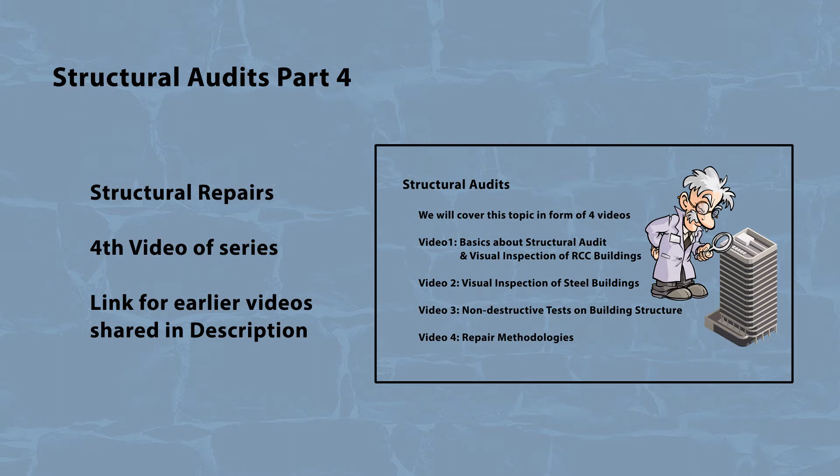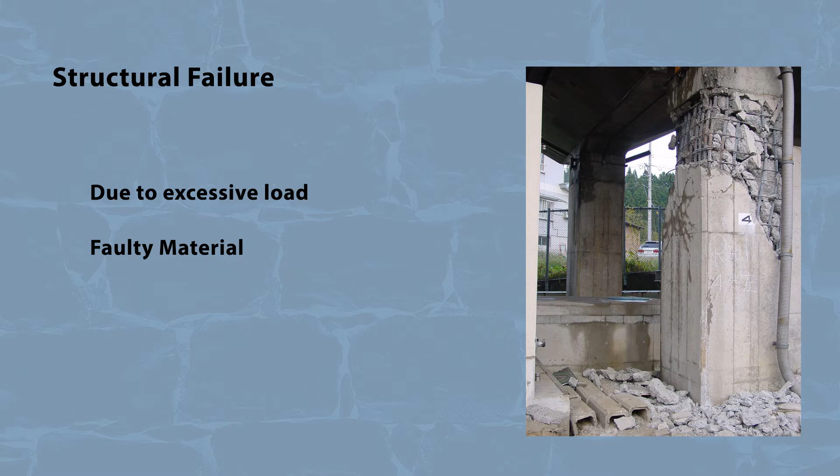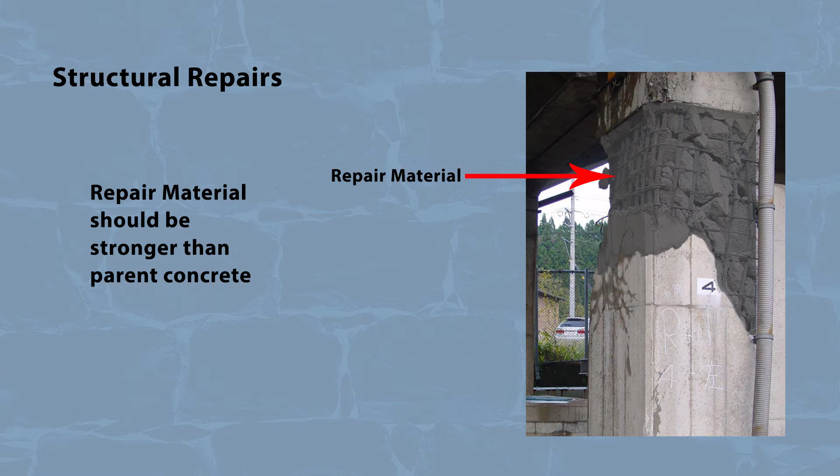Structural repairs are required due to failure of existing structure or some part of it due to any reason like excessive load, faulty construction material, etc. Hence, any new material which we use for structural repairs must be stronger than the existing materials of construction. In this video, we will be focusing upon repairs of RCC structures.

Any part of structure where repair is required must be opened and all loose material in it shall be removed. This area shall be thoroughly washed with water. The diameter of existing reinforcement is checked, and if it has become less by 1/3 of existing reinforcement, new reinforcement bar is welded to the existing one. After this, anti-rust chemicals of any good manufacturer are applied on it. This whole procedure completes the surface preparation for repairs.

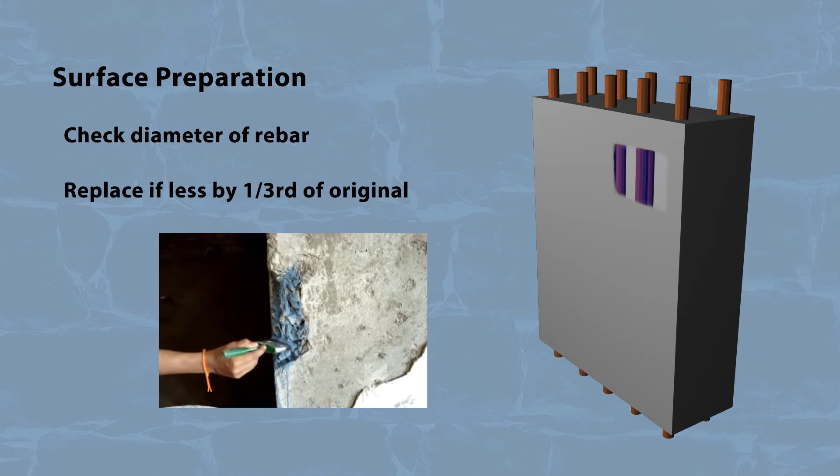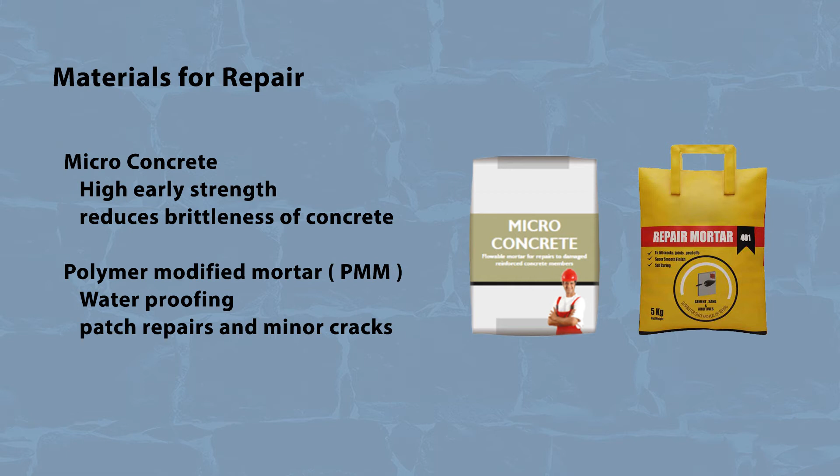Generally, two materials are preferred for structural repairs: polymer modified mortar or microconcrete. Microconcrete is most cost effective for improving high early compressive strength, tensile and flexural strength and reducing the brittle nature, while polymer modified mortar is useful for waterproofing and patch repair of minor cracks of the structure.

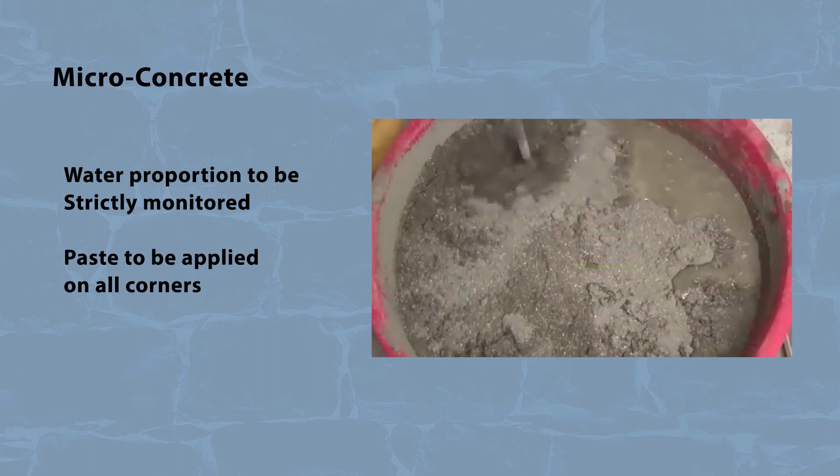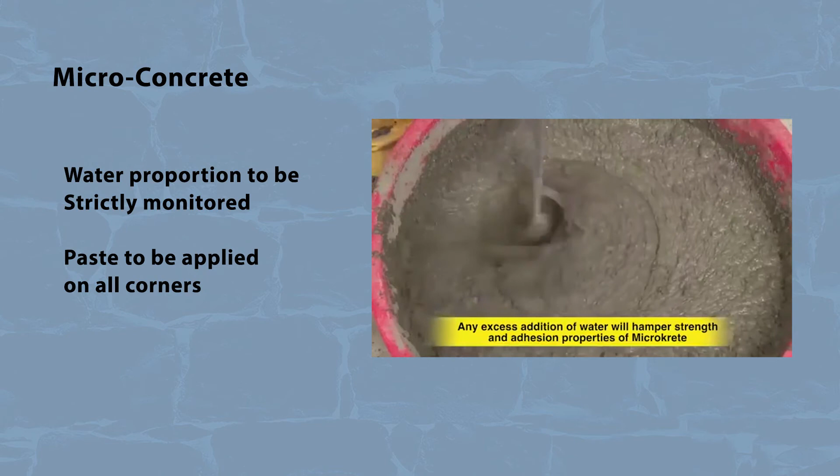Microconcrete is available in powder forms in ready to use packets. We have to use this powder with proportion of water as mentioned by manufacturer. The resultant paste is applied on the repair surface, which is prepared as per methodology mentioned earlier. While applying it, one must be careful that paste goes in all nooks and corners of the surfaces.

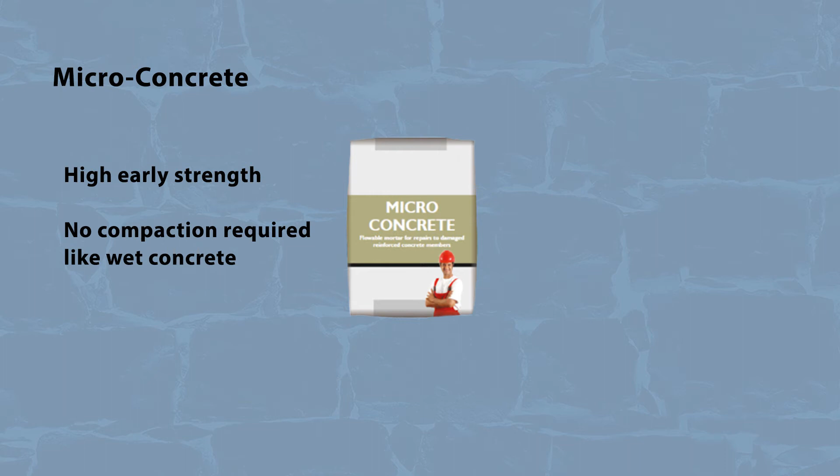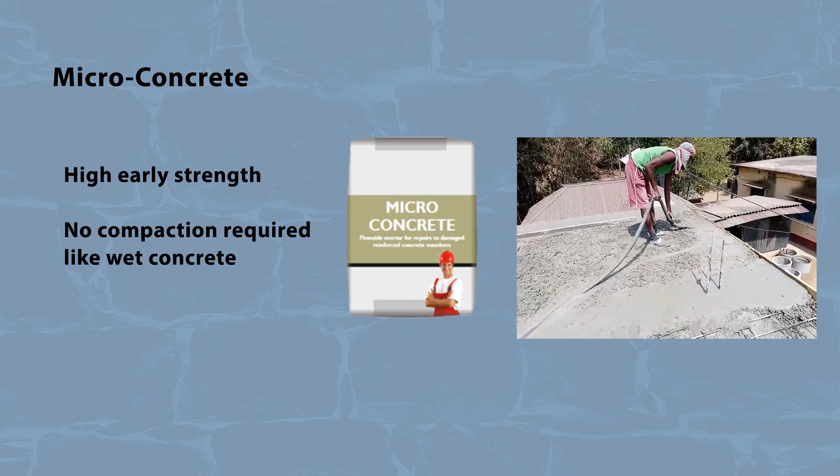Microconcrete is high early strength concrete, where there is no need for compaction. This means this concrete gains strength very quickly, even in a day depending on manufacturer, and there is no need for compaction like that of wet concrete.

Mortar is a mix of cement, sand and water. This is used for plastering works and also for joints in masonry work like brickwork. Polymer modified mortar means mortar being modified by use of some polymer compounds. These compounds give high strength to mortar, making it even stronger than the parent concrete of the material to be repaired.

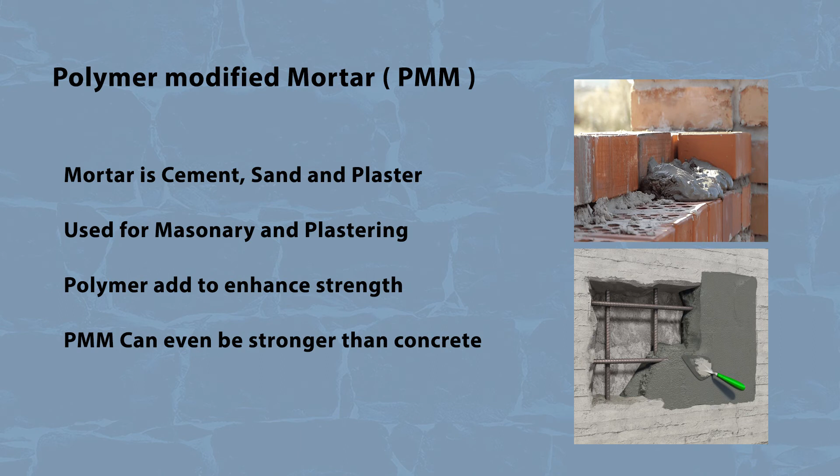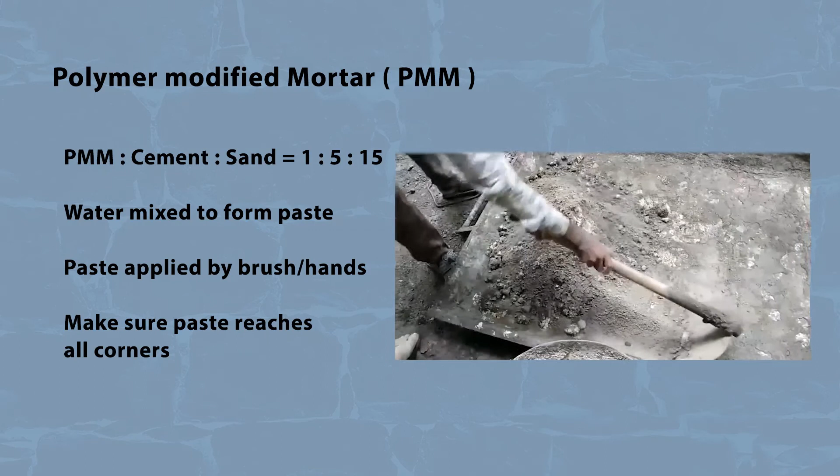In case of polymer mortar or PMM, first cement and then water is mixed in proportions as directed by engineer or the manufacturer. The resulting paste is applied similar to that of microconcrete. Care shall be taken that paste reaches every corner and covers the entire area.

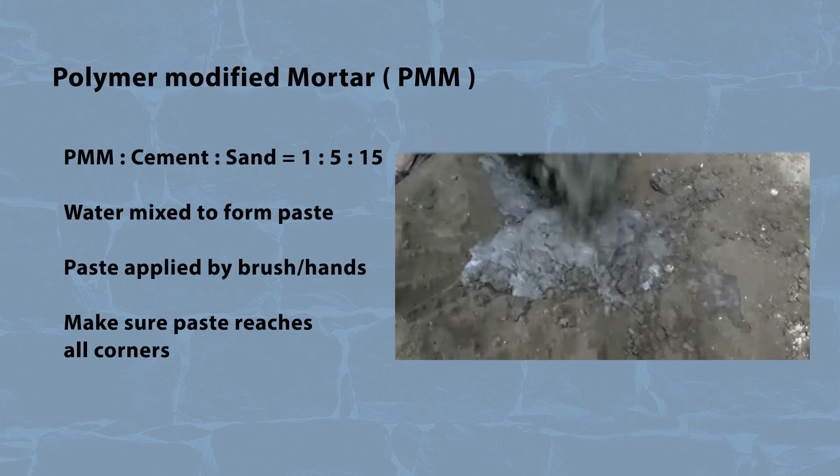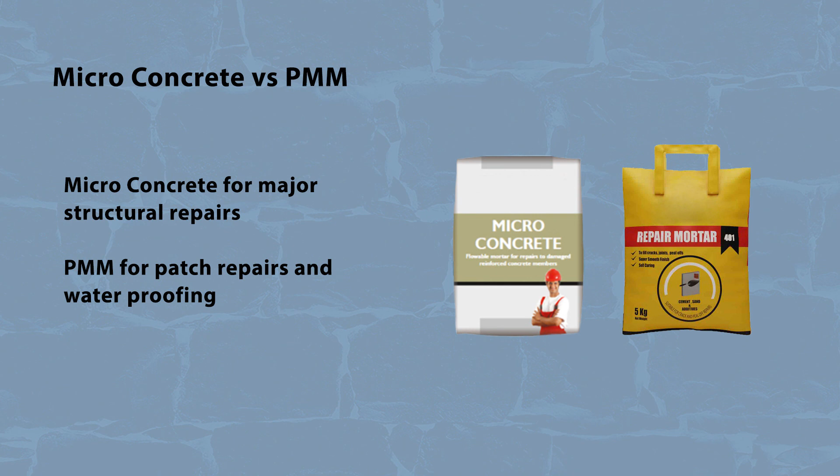We recommend to preferably use microconcrete for all major structural repair works, while polymer modified mortar or PMM can be used for patchworks or waterproofing or for minor structural cracks, etc. We have completed our series on structural audits. We recommend to use all videos as a guideline and always consult a competent civil and structural engineer for all your construction needs.